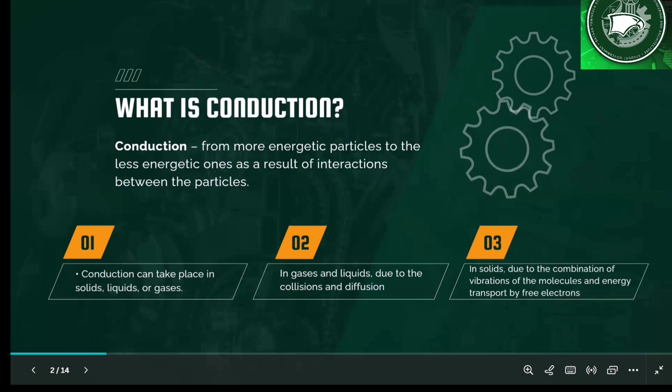Conduction can take place in solids, liquids, or gases. In gases and liquids, it is due to the collisions and diffusions, and in solids, it is due to the combination of vibrations of the molecules and energy transport by free electrons. So, energy or heat transfer works in conduction if both materials are not moving. That's the key concept on conduction. Next slide, please.

So, how does conduction work? The rate of heat conduction through a medium depends on the geometry of the medium, its thickness, and the material of the medium, as well as the temperature difference across the medium.

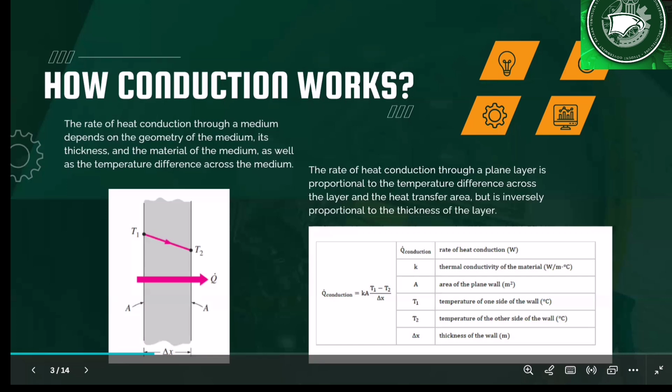So, for the formula ng heat conduction, Q conduction is equal to K, which is the thermal conductivity of the material. Ang unit is watts over m times degrees Celsius, times A, which is the area of the plane wall, in meters squared, times T1, temperature of one side of the wall, minus T2, temperature of the other side of the wall, in degrees Celsius, over delta X, or the thickness of the wall. Ang unit is m. Next, please.

So next is convection. So what is convection? Convection is the mode of energy transfer between a solid surface and the adjacent liquid or gas that is in motion, and it involves the combined effects of conduction and fluid motion. So yung convection ay ito yung energy na nag-transfer mula sa solid papunta sa liquid or gas.

So may two types of convection. Una is natural free convection, if the fluid motion is caused by buoyancy forces that are induced by density differences due to the variation of temperature in the fluid. And next one is forced convection, if the fluid is forced to flow over the surface by external means such as a fan, pump, or the wind.

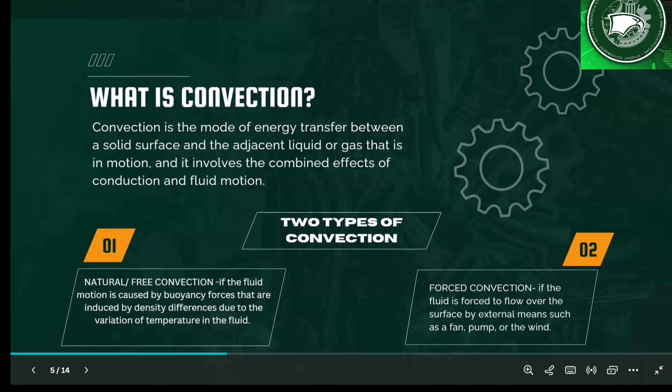How convection works. So, the rate of convection heat transfer is observed to be proportional to the temperature difference, and is expressed by Newton's law of cooling. So, unlike sa conduction, paglipat ng init through direct contact, ito namang convection, ito yung paglipat ng heat through moving fluid like yung sinabi ko kanina, hangin or tubig.

And the convection heat transfer coefficient H is not a property of the fluid. It is an experimentally determined parameter whose value depends on all the variables influencing convection.

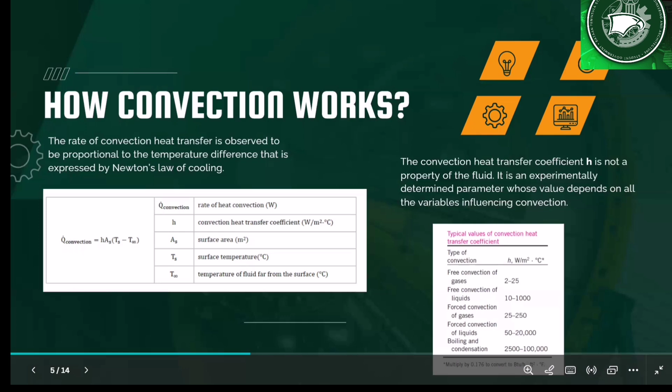So ito namang box sa kanan is yung mga typical values of convection heat transfer coefficient. So ito yung mga different types of convection. Free convection of gases na 2 to 25 watt per square meter degC. Yung free convection of liquids na 10 to 1,000. Forced convection of gases na 25 to 250. Forced convection of liquids 50 to 20,000. And yung boiling and condensation nasa 2,500 to 100,000.

Next please. So at this point, magsasagot na tayo ng sample problems. Meron tayong 6 sample problems. Consist of 3 sample problems about conduction and 3 sample problems about convection. So yeah, sagot na tayo.

Sample problem number 1. The roof of an air-conditioned home 6 meters long and 8 meters wide. Given na yung dimensions, makukuha natin dito yung area. And 0.25 meters thick. Ito yung value ng X. And it's made of a flat layer of material whose thermal conductivity is K, given na yung K natin, which is 0.8 watts per meter degrees Celsius. The temperature of the inner and outer surfaces, given na yung T out and T in natin, which is 20 degrees Celsius and 27 degrees Celsius respectively. And given for a period of 12 hours, binigyan tayo ng oras, which is yung value ng change in time natin, 12 hours. Ngayon, hinahanap sa atin is determine the rate of heat gain through the roof that night.

Given values, A, 6 meters times 8 meters, makukuha natin yung area, which is 48 square meters. Delta X, which is yung thickness, 0.25 meters. K, which is yung thermal conductivity, 0.8 watts per meter degrees Celsius. Temperature in, which is 20 degrees Celsius. T out, which is 27 degrees Celsius. Given na yung oras natin, which is delta t, 12 hours. Required na hinahanap is Q conduction in kilowatt.

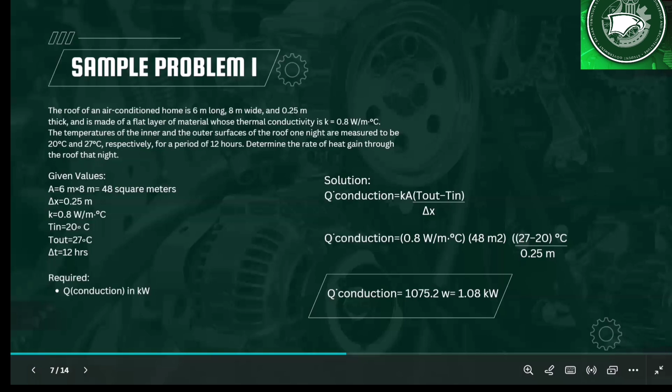Makukuha natin sagot is 1,075.2 watts. Ang hinahanap sa atin is unit in kilowatt. So, divide natin siya by 1,000. Makukuha natin is 1.08 kilowatt.

Sample problem number 2. Determine the thermal conductivity in watt per meter degrees Celsius of a 5 meter by 6 meter brick wall having an inner and outer temperature which is 20 and 5 degrees Celsius respectively. The rate of heat transfer through a 30 centimeter thick wall is 1.035 kilowatts. Binigyan tayo ng values ng dimensions ng wall, which is 5 meters by 6 meters. So, pag multiply natin siya, makukuha natin yung area, which is 30 square meters.

Given na yung T in and T out, ito yung sinasabi ko kanina guys, na yung T in and T out is interchangeable. Kung alin yung mas mataas, yun yung minus natin ng mababang value, which is 20 degrees Celsius minus 5 degrees Celsius. Yung value ng Q conduction natin is in kilowatts. Kaya ang hinahanap sa atin is K in watts per meter degree Celsius.

So yung 1.035 kilowatts, i-convert natin siya sa watts. Multiplied by 1,000, makukuha natin is 1,035 watts. Binigyan din tayo ng value ng X, which is yung thickness, 30 cm. Ang unit ng K natin is in meters. So i-convert din natin yung 30 cm in meters, which is 0.3 meters.